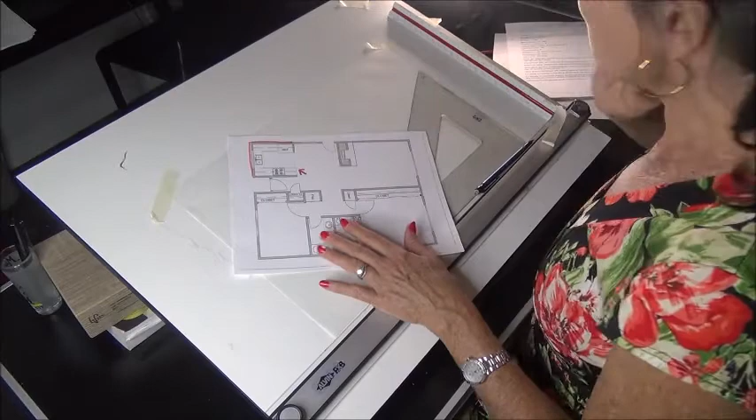Now, you have your floor plan that you drafted and you've designed your kitchen. We are going to create a three-dimensional viewpoint of this kitchen. You have to find out what view you want to look at. We're going to omit this wall because if we raised it up, we would not be able to see inside the kitchen. So we're going to focus on these two walls. So in order to start that, we are going to have to actually draft just this little area.

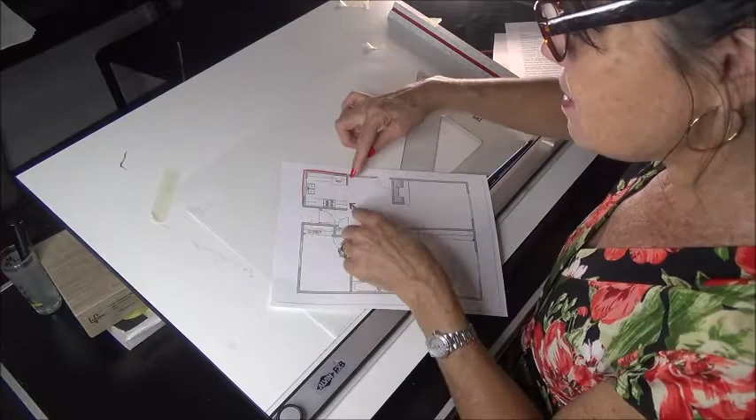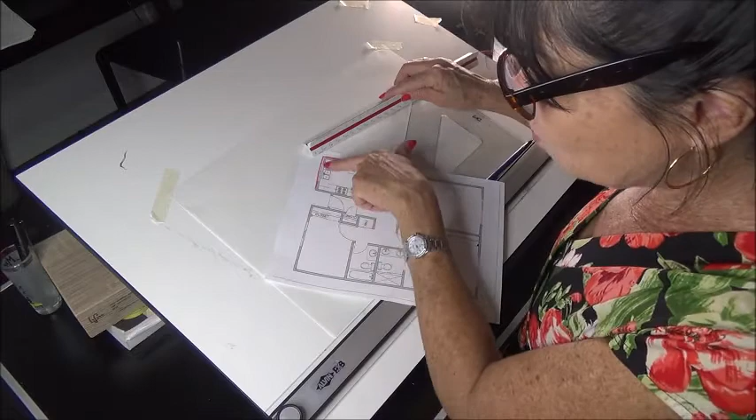How do we find what our measurements are? Go ahead and use your scale. So this wall from inside to inside, for me, I have approximately 8 feet 3 inches. We will not be drafting this little teeny wall. We will see a refrigerator, some cabinetry, the window, and a sink. That's what we're trying to draft right there in the corner.

So that is 8'3", and then this length is 8.5. So we have 8'3" by 8.5. So we're going to kind of create a rectangle. First thing to start off with is you have your blocked out drawing. Take your 30 triangle. We're going to use the narrower angle.

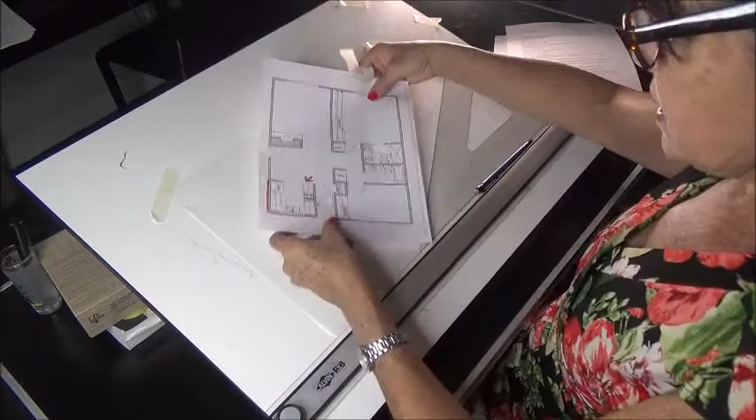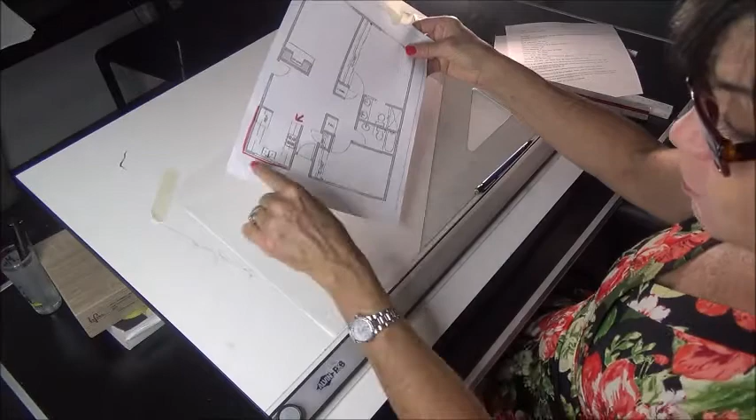As I explained in the lectures, the isometric is different than a plan oblique. A plan oblique, we would just be using this and just raising up. But the isometric is taking this drawing and kind of flattening it out so it's not so extreme and tilted. So when we do an isometric, it looks a little bit more realistic. The plane has just been shifted down. When we did our oblique plan, we brought everything straight up, using this very severe 45-degree triangle. Here we're using a 30-degree triangle and basically tilting the picture plane down. So instead of just using our floor plan, we actually just scale back and forth.

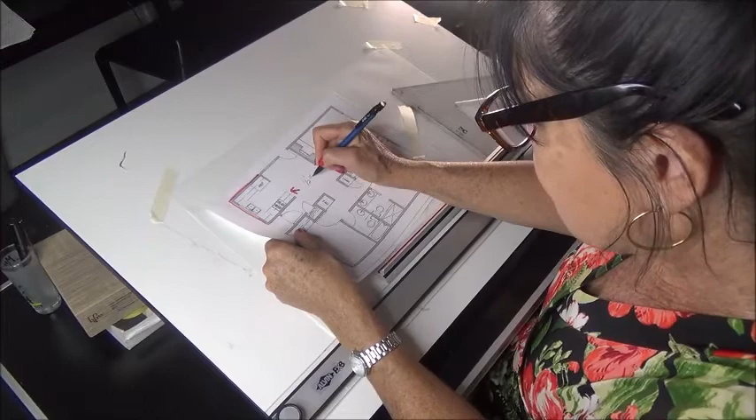So first thing I do is I grab my 30 triangle and I create a light line this way, and I create a light line this way. And then I measure out, right here, what is this length? I measured it out already. It was 8 feet 3 inches. And remember, we are going to blow this up to a 1/2 inch scale. Right now it's a 1/4 inch, so we've got to convert it.

So go to your 1/2 inch scale and make sure that you make that 8'3" or whatever your dimension is. So there it is, I did that. Then I did the other dimension, which was 8.5. And now I've created a little rectangle. This is my floor. And then I close it off. So here we have like a diamond.

Now we're going to bring up some vertical walls just to create our boundaries. So right here, we're just going to lightly do some walls. And we only need 3 walls because we're just looking right into this corner. Now we have to figure out how high our ceiling height is. Well, we know it is 8 feet. All you have to do is measure one area of 8 feet. And the beauty is you use your triangle to do all the work.

As you lift this up, and my little parallel bar is being difficult as always, not my favorite. But as you lift this up, you just slide your triangle all the way across. You can also, if you have any issues and don't want to move your triangle, measure 8 feet, and then use your parallel bar, slide it up and just connect it. And then you flip it and you connect it the other way. And this will make your life easy.

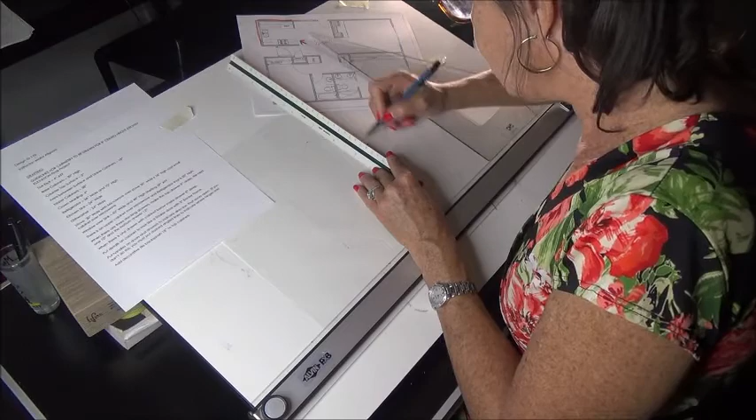How high is that refrigerator? It's 70 inches. So we know that 5 feet is 60 inches. So it's 5 feet 10 inches, 70 inches. So that refrigerator comes to about there. We're just doing a back box. Now we will make it project. And that's what's kind of cool too. Just flip this over and you bring it from the corner.

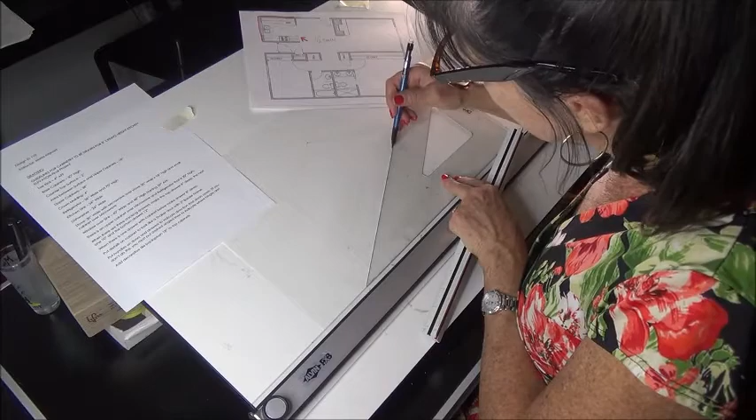Now we need to know, how deep is this refrigerator? Well, I may not have told you, but the refrigerator is usually about the same depth as your cabinets, which is 24 inches. So you go 24 inches. And once again, I'm flipping my 30-degree triangle. Look what I'm doing. I'm creating the top of a box. Now I will bring this down, and voila, I have now carved out a box that is my refrigerator. That's how you get this going. You start carving out different components.

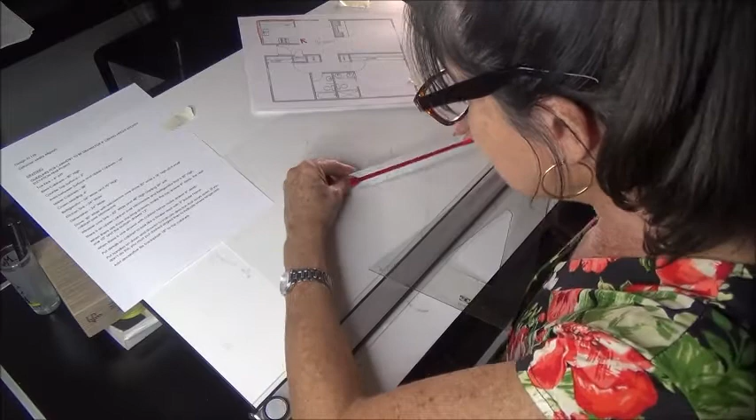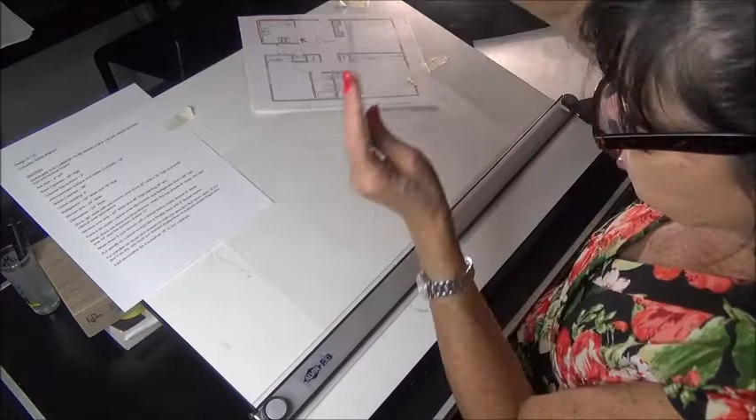Now we want to think of what's going on in the footprint here. Well, we have all these lower cabinets. Lower cabinets are 24 inches deep, and we learned that on our elevations. So we're going to do a little, what I call a ghost line on the bottom. There's 24 inches. You just come over here, you measure 24 inches, boom. So we're ghost lining that, and then we're going to measure 24 inches this way to create our bottom little pattern. So as you start to carve this out, I'm flipping my triangle. That's the bottom of my cabinetry.

Well, now I want to bring my cabinetry up. So we just do some lines here. See what I'm doing? I'm boxing this out. Now, I know I broke down all the components of your cabinets, but let's just look at an overall box. 4 inches plus 30 inches plus 2 inches equals 36 inches total. So when we look at a cabinet, we have a 2-inch counter, a 30-inch cabinet, and a 4-inch toe kick. That's from the side. But the total is 36 inches from the top to the bottom.

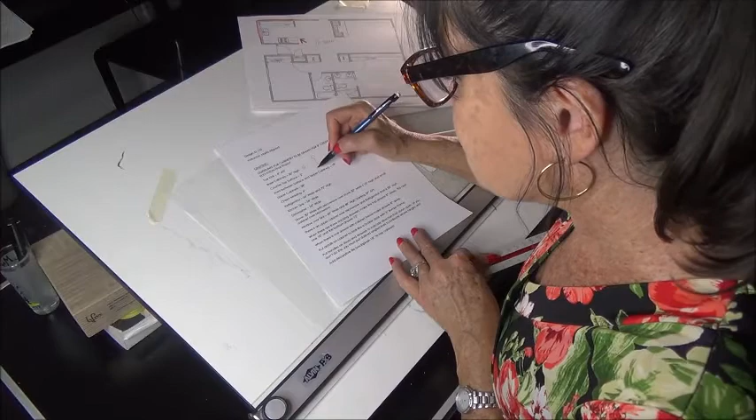So we are going to go up 36 inches here just to give us an overall box, to box out these cabinets. What I love is once you find it, you just use your triangle and it does all the work. You flip, you don't have to keep measuring. You can get that back wall there. Go to here, and then you just keep flipping. So now as you can see, I've got my countertop all squared away. There's a refrigerator and a countertop. We'll carve in the little pieces later, but we can even do that now.

If this is the top of my countertop, we're going to go downward. We found out that our countertop is 2 inches thick. Remember, this is a 1/2 inch. So that's 2 inches. So I'm going to give my countertop some thickness right here. And I'm going to flip it and give that countertop some thickness. It's right there. So we got some thickness here. And then we want to flip it again, showing the other side of the thickness. See, now all of a sudden we have a countertop.

Now, we want to also have a toe kick that goes in 4 inches. So we're going to carve that out. It's 4 inches high by 4 inches deep. See what I'm doing? 4 inches. Everything is almost like a series of cubes. So you go up 4 inches.

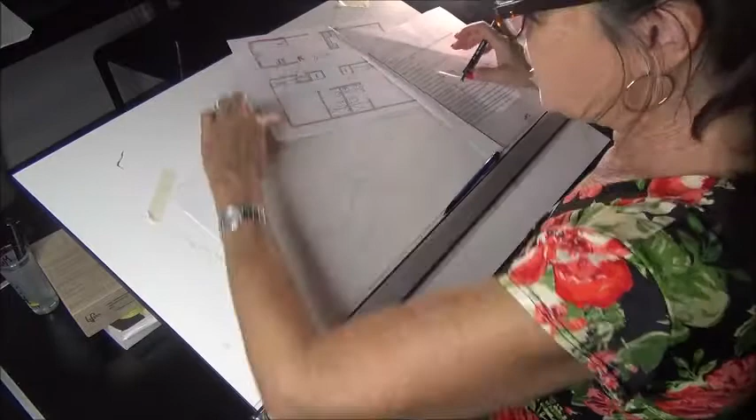The next thing we want to do is carve out other components. So remember, we also have a window here, and we have upper cabinets. And upper cabinets, as we know, are right here. They give us our dimensions. We have what's called a backsplash.

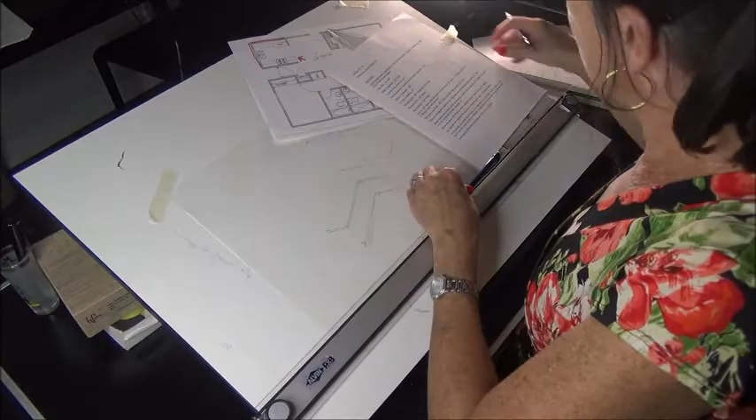And remember on here, the backsplash, the distance between the upper cabinet and the lower cabinet was a total of 18 inches right there. So we go 18 inches in our 1/2 inch scale. Boom. And that gives us our back little line. We always just kind of create an outline, like a ghost line. So now we know that the back line of those upper cabinets right over there goes to here. Okay, that's the back line.

Now look at this. There are no upper cabinets over the window. So we're just trying to create some cabinets to pop out here. This is a window, so there's no cabinets. Remember, in our elevations. So we want to make sure that we don't put cabinets everywhere. So once again, that's the back of the cabinets. Cabinets stick out 1 foot. So we want to make sure this comes out 1 foot. So this is just the back of the wall.

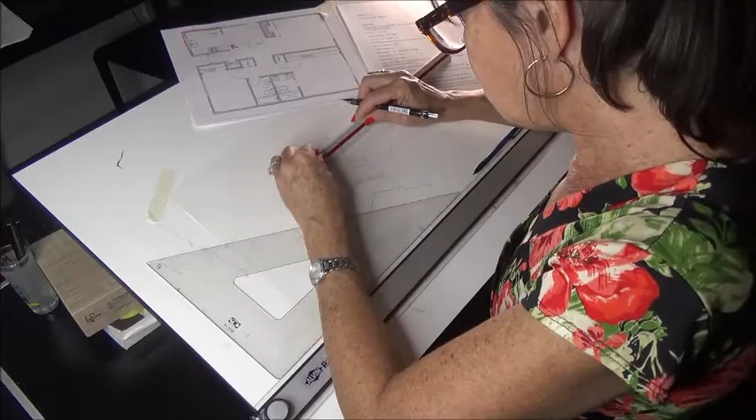So we measure 1 foot at 1/2 inch scale. So 1 foot comes out here. Okay, so I'm trying to create and show how that cabinet comes from here to about there. It's 1 foot. Measure 1 foot. Perfect. Now we're trying to get the bottom of that cabinet, and we're creating once again another box. And we will bring these cabinets up.

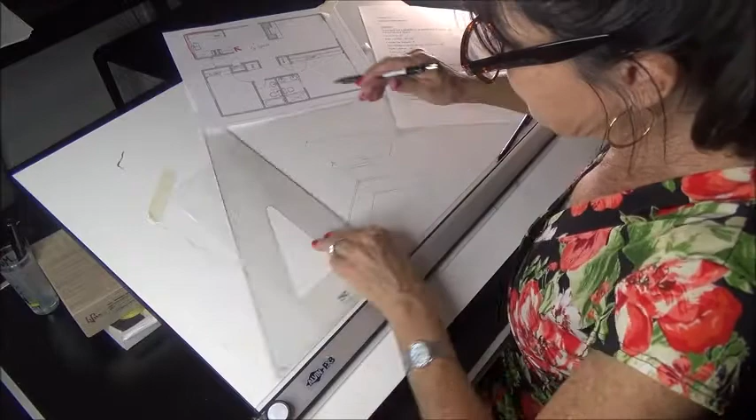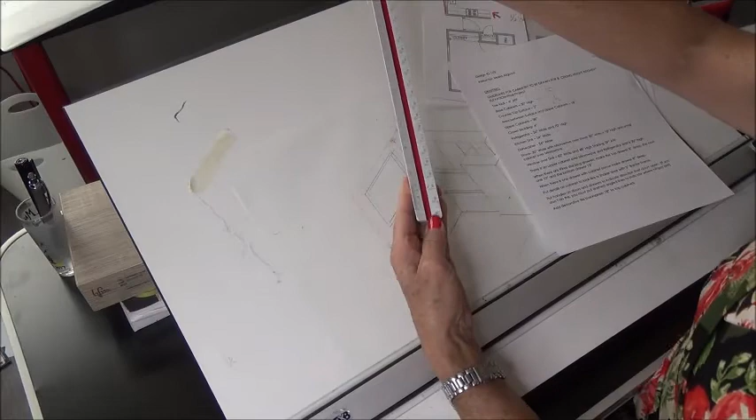And how high are our cabinets? So the upper cabinets are going to be 38 inches. So we mark off 38 inches, and then we will have our perfect measurement. Remember, 1/2 inch. So we go up 38 inches. And boom, which is really 3 feet... Let's see, where's my half inch? There we go. 3 feet, 2 inches. There we go. And I have just drawn those in really quick. So you just basically zip.

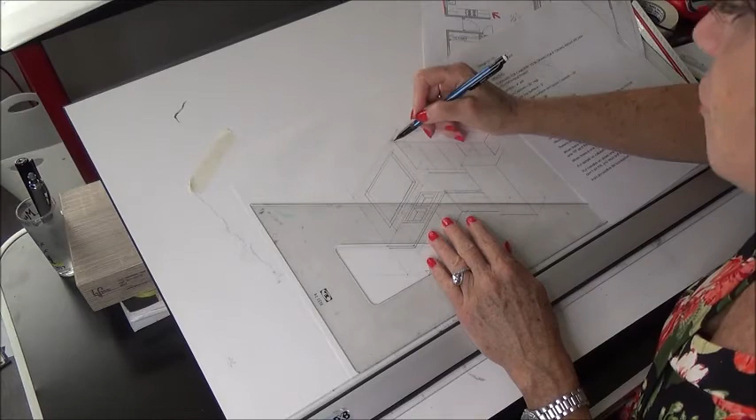Now we also have a little bit of a crown molding on top. So that is 4 inches. So you'll measure 4 inches up, create a little molding on top. And that will give that top crown little area. And then the molding usually comes out a little, so we kind of create just a little detail edge. It just kind of comes in a little, like real crown molding would.

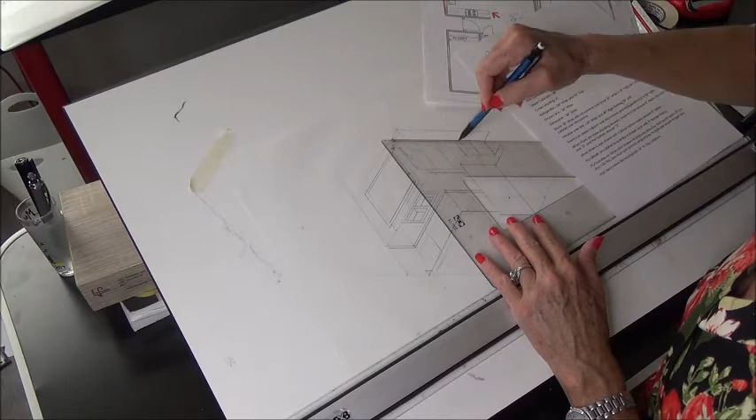And that's just something that you can try to do on your own and create a little finesse. But we like to create a little molding that's on top there. So now you see that that actually tops off the upper cabinets. Then you go ahead and divide them. Then I've created the sink, and we added some depth in there, so you figure the depth of a sink. And all that information's here.

The sink is 34 inches wide. You just measure it right from how far it is from the wall. And we also have all our window measurements. Everything you need is here. The windows are 60 inches wide by 48 inches high. Now remember to add a sill and create some depth. And then based on your elevations, you will design the cabinetry the way that you designed your elevations.

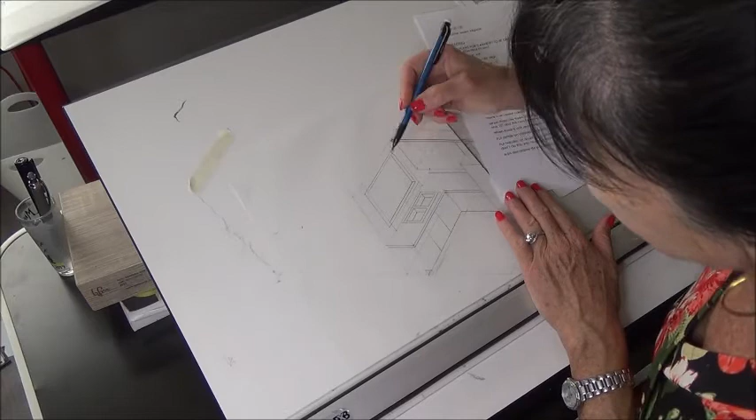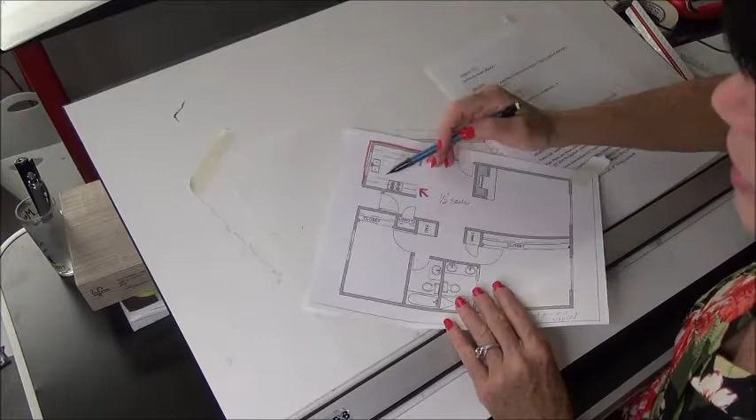If you happen to put drawers here, then you'll put drawers. If you put just cabinets, you'll put cabinets. Don't forget to put your backsplash tile, whatever you designed in your elevations, and continue it if you've designed it to go all the way to the ceiling or just to a certain height here. You don't see a lot of it here, but once again, if you're running a subway, you just use the triangle, and before you know it, you will have a beautiful carved out isometric of your kitchen, that very little corner. So I'm very excited to see your interior elevations of your kitchen come alive in this 3D isometric drawing.